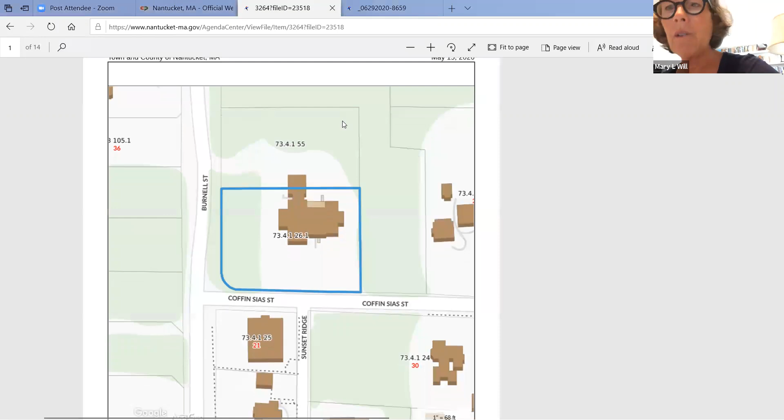Is this the existing, the old Watrous house? No, this is Mrs. Watrous' house. It's the submission by the Gabriels to basically change the house to some degree - windows, gable. Basically they're creating more of an upstairs. The house had an upstairs, it got knocked off the back. Oh yeah, that's right. And so they're recreating it above the main body of the house. So, if you all can see this on the screen.

Yes, okay, this structure here - Chip Webster is the architect. This has been before the commission since COVID. These are the latest minutes from the June 8th meeting for revisions. I have provided comments to the commission as well. It is in your purview, obviously. This structure is not historic, from 1994, but there are changes proposed to it.

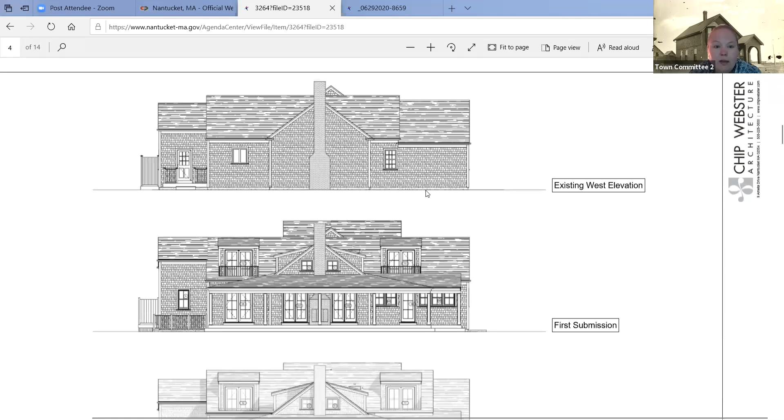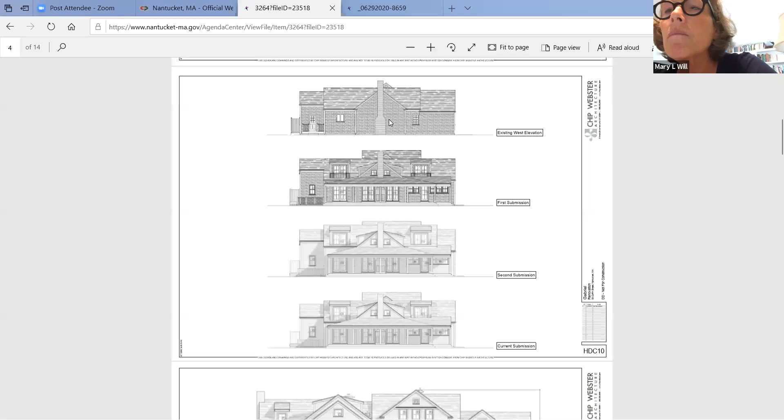And the commission has provided their comments mostly on the west elevation, as you can see here, where you have hardly any fenestration, and then all of a sudden you have a lot. Oh yeah. There is a discussion on that gable, and then the long ridge, as you can see through these. Let me know if I'm going a little too fast - I'm trying to make it so you can see all of these submissions. This was the original, then this is the first submittal, second submittal, and third submittal. As you can see, the commission's been trying to request those things.

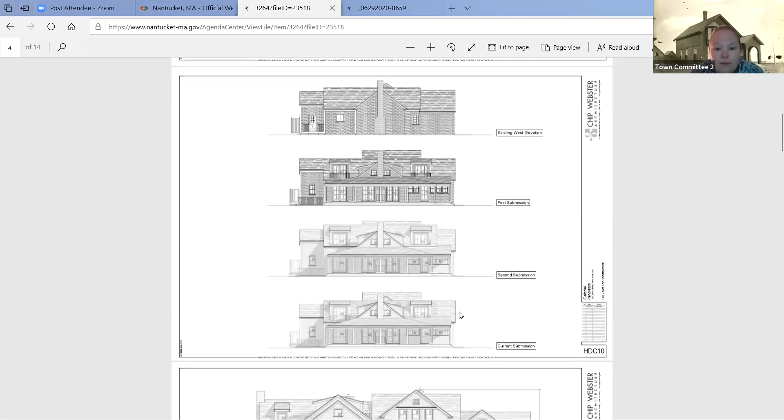Doesn't look like there's been much change in those three iterations. Yeah, it's mostly been the long ridge plane, as well as the size of these gables. I did offer a suggestion to Mr. Webster about possibly, instead of having a shed dormer flanking, a gable end to match that gable end, because at the end of the day they're trying to provide some sort of access, but of course it's the most visible too. So let me go through and show you the changes that they've done.

You can see this is the south elevation. And that faces Coffin Street. Yes, yes, yeah.

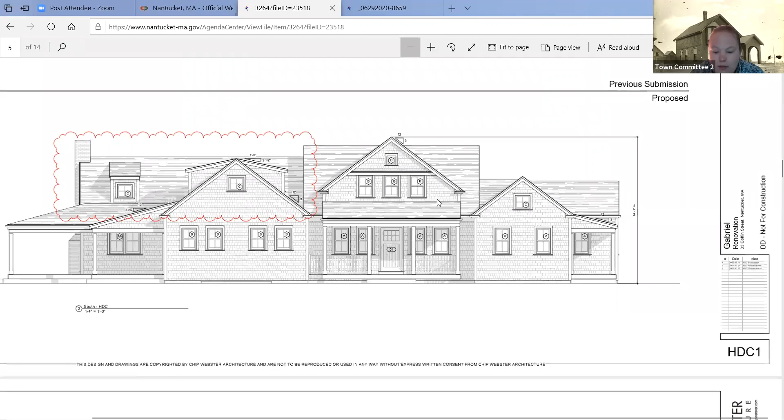Here's the north elevation, and there's discussion of the distance of the decks. Mr. McLaughlin's really good about making sure they meet those requirements. And here's the changes in the ridge.

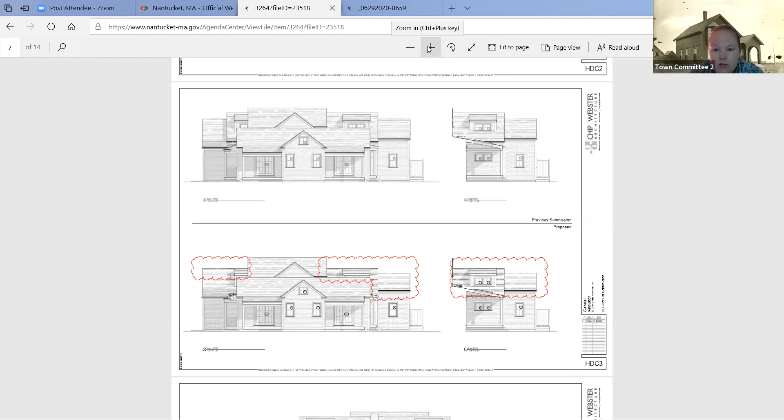That's come down quite a bit. I see.

So here's the view from the west elevation. I was looking at the west, and I thought the first proposal and the third proposal were exactly the same, which is what Holly pointed out as well. And as you can see, even here, that ridge, without looking at the scale, we don't know exactly what that is, but it looks pretty long.

Not broken up. We've got the schedule, those changes to the floor plan, and those decks.

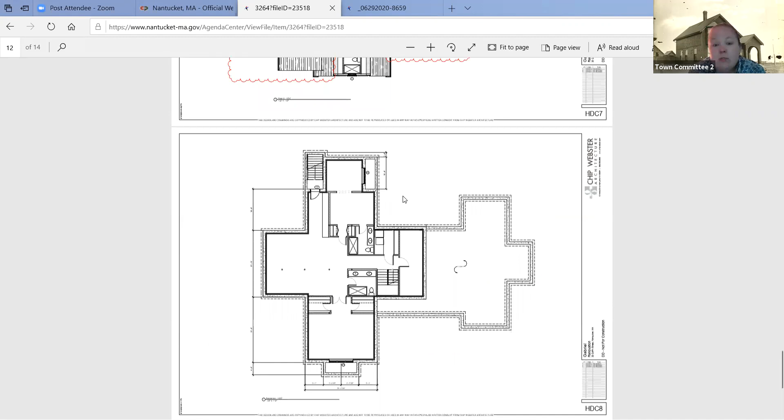This application or this property also received a review and approval, essentially, for their landscaping, hardscaping, for the proposed pool. Both staff and the commission were concerned. I apologize, I'm trying to make it so you guys can see it.

You're doing fine. Thank you, I don't have a mouse. This is a new laptop, or new to me laptop I got from the town, so bear with me.

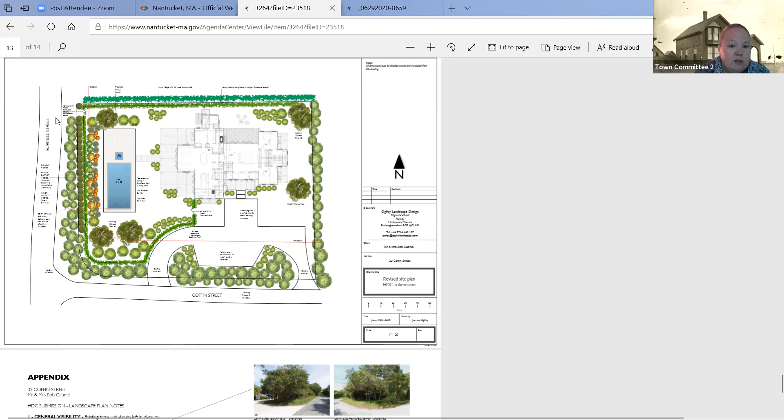So they did essentially approve the pool, or the landscaping plan for the pool. There were concerns on the visibility, obviously. There are going to be a lot supplementing the existing, and also the gates, the proposed gates, just didn't match.

Here's the hardscaping and the landscaping that they proposed. So that's just in here as an FYI for you all, but I can go back to the elevations.

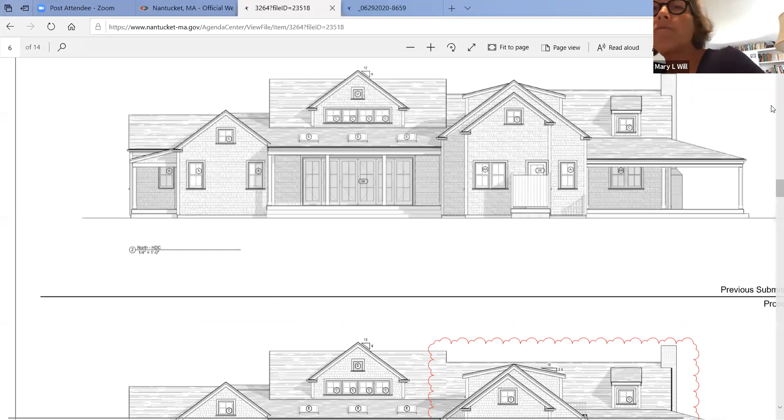So the reality is that the house, the west side, really won't be seen from Burnell Street, given all the vegetation that's planned. It's pretty hard to see the house from Burnell Street as is now. That extra long ridge line, interestingly, there was an even longer ridge line before they knocked the back of the house off in order to subdivide the property.

So the Gabriels, actually, their extension of the west facade is not as great as the west facade used to be, I believe, when it had a garage apartment back there. But the garage apartment had to go so that the property could be subdivided because it crossed the boundary line.

So I don't have a problem with the length of the ridge line. I mean, this is a house which isn't the most architecturally beautiful to begin with, I would say. It seems kind of in keeping. If anything, it's a little bit more visually interesting on the west facade now than it has been.

Yeah, the west facade is where the pool is, so obviously they want the French doors to go out to the pool. Exactly, which looks fine to me.

Yeah, at the moment there's quite a bit of vegetation between Burnell Street and there, and looking at their plan, it looks like they want to keep it there, keep it that way. And increase it. Yeah, and it's pretty secluded within the lot.

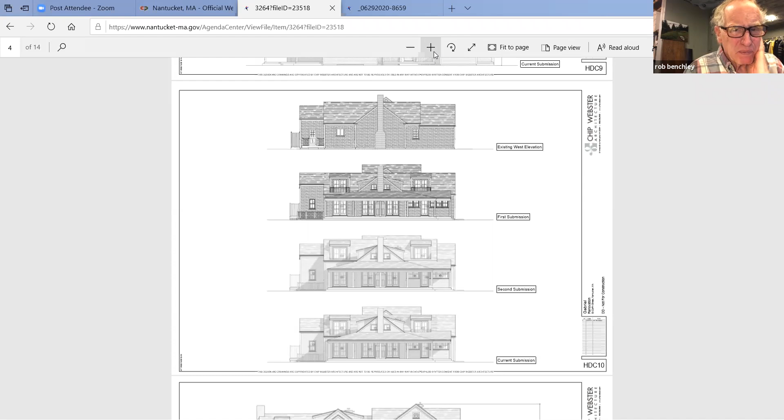I would argue that the fenestration, which I believe is the thing we have a question about, that it has quite a lot of additional fenestration. I would argue that actually improves the look of that facade, that west facade.

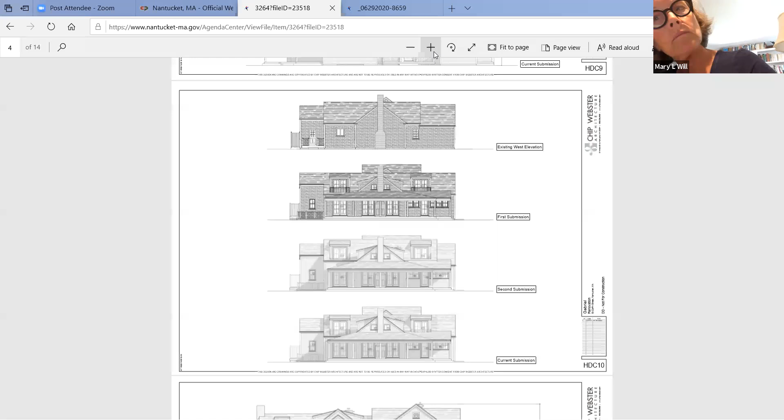Angus, do you have anything to add? I feel like it's unfortunate that there are two competing centers to this house. There isn't a part that looks, except for the front door, that clearly says this is the beginning of the house and we're sprawling out from here. That addition to the west of the original section just feels higher than it should have for the height of the original part. It feels like there's too much of this house that's the same height.

I feel like the fenestration on the lower level does enhance, and I understand, facing the west, the pool on the first level, that makes sense. Where I really have problems with this proposal is with the dormers. They're not meeting the minimum 4 pitch. One of them is 2.5 and the other one is 3 pitch. It feels like a flat roof box trying to do exactly what it's doing, which is to provide space where there wasn't any.

And I don't think it's graceful. So like that gable that faces Coffin Street, I would remove those dormers or reduce them to at least a 4 pitch.

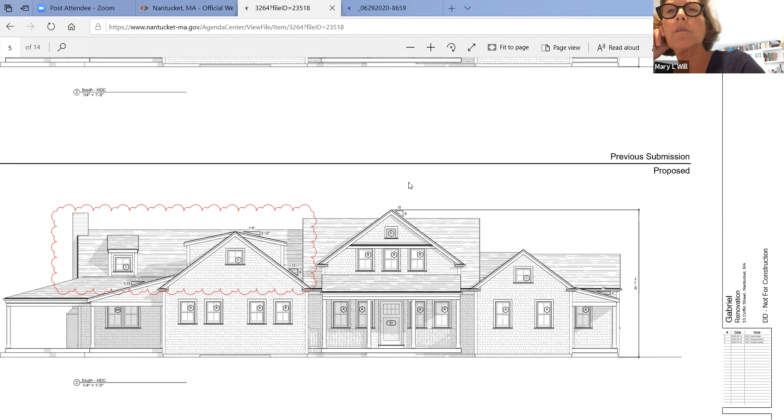And that's, and the change in that pitch is within the guidelines. Yes, correct. Thank you.

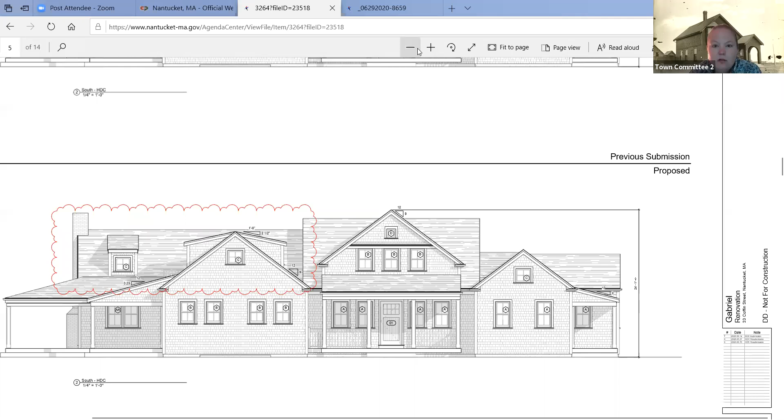Okay, any other comments? Holly, did you already make comments on this? Is that what you're reading in the very beginning? Yes, I did. That is the, if you have the view pack, it's 33 Coffin Street staff comment PDF.

Yeah, I've reviewed it a couple of times. I think I reviewed it for June 8th and June 16th, and unfortunately I was not present at the June 8th meeting. I took the day off for my brother's graduation. But on June 16th, they didn't seem to address the issues the commission brought up regarding this west elevation and the visibility of that long roofline.

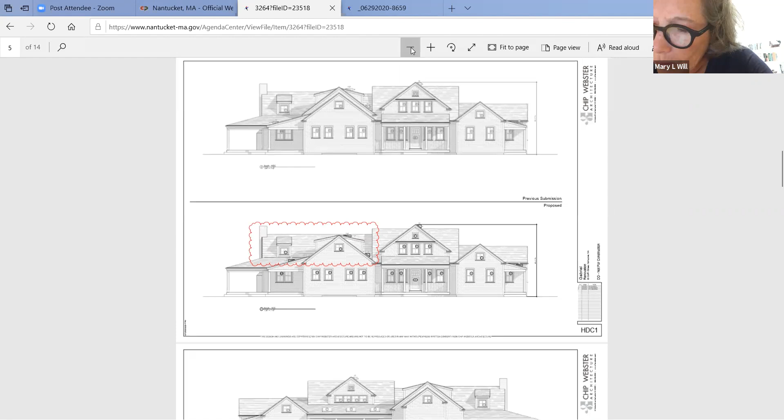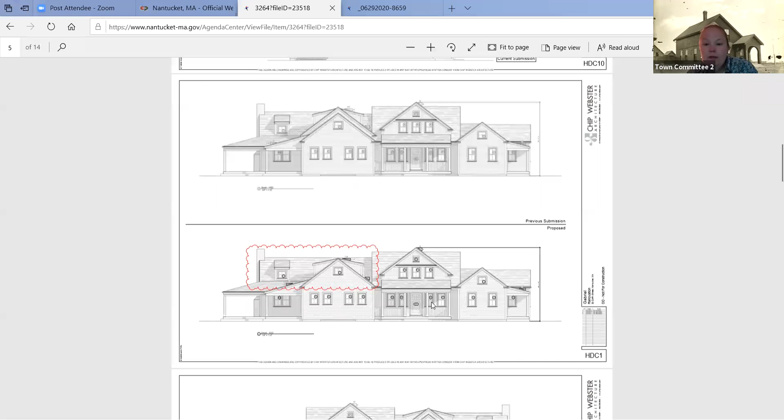Yes, sir? I'm sorry, I note also you said the pool was not moved towards the house as requested. Can you tell if that's still the case? No, actually at the June 16th meeting they did approve it, that they were fine with that proposed landscape plan. This PDF seemed to address their concerns with the visibility.

I think this is a great indication of the site plan here. Seems to really... Yeah, Rob, I remember hearing that in Sconset you're not supposed to have a circular driveway or two entrances to one house.

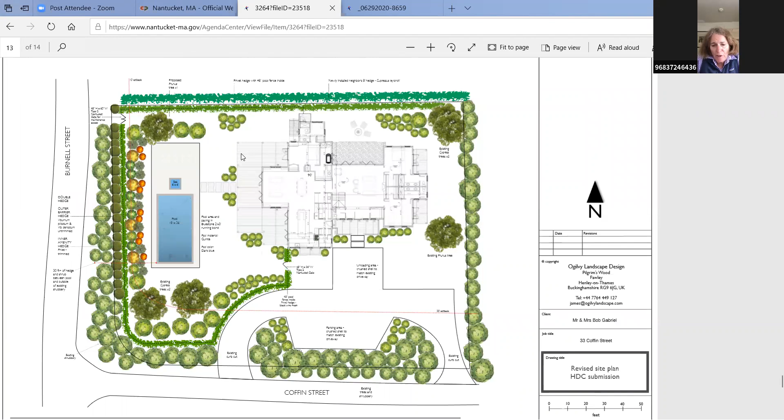But the house next door to this house also has an oval, or curving driveway with two entrances. So I assume that was approved by the landscape people.

I also, on that point, Clement, I believe this driveway was pre-existing. Yeah, it is, and that nothing has changed. So therefore, from the zoning bylaw perspective, that's fine.

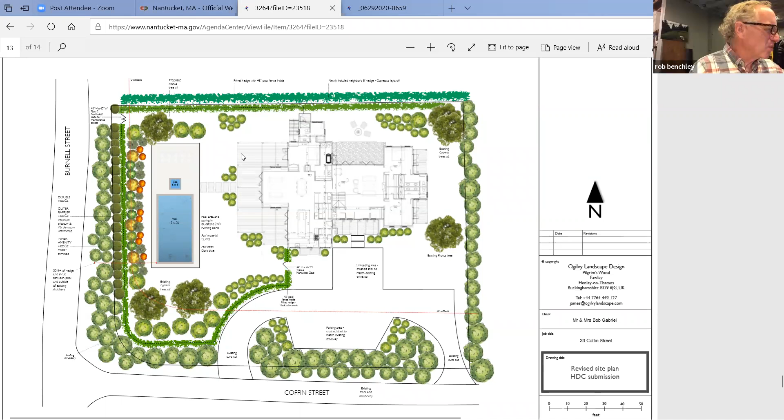Pre-existing non-conforming. Yes, if there's—and I haven't confirmed that 100%—but if there's aerials showing it prior to '98, then it's pre-existing non-conforming from a zoning perspective.

Does the commission or the board have any other comments on this one? I don't think so. All right, we'll go on to the next one.

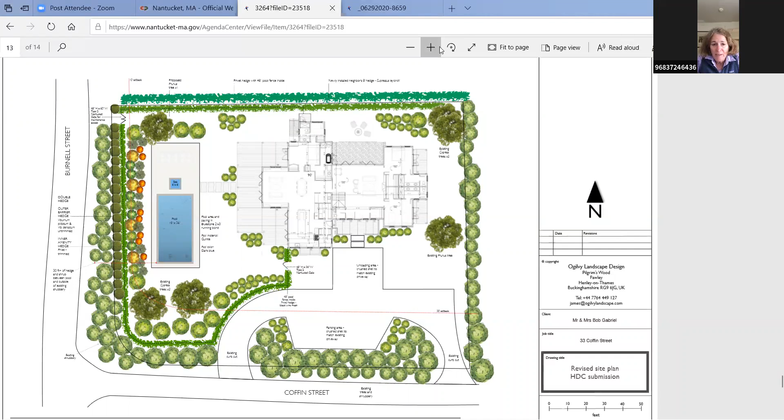Well, the one comment I had that's kind of weird is that when you go from the pool to the bathroom, you either have to go through the living room, the kitchen, or go around to the outside. Usually there's a pool house, but I guess they cannot build another house, so you have to go all the way around. But that has nothing to do with us, that's their problem.

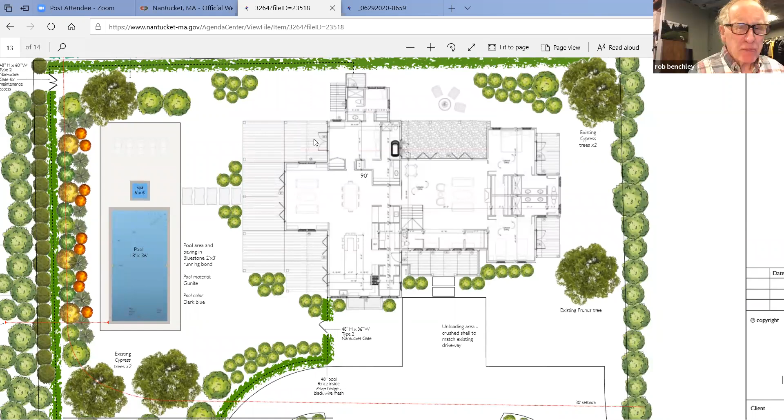And there was a question asked if there was going to be any other accessory structures, if you will, and they said no. Just pee in the pool. Yeah, or the... love them.

All right, and I hope you all were able to see the other documents for this application that was available in the packet. That was the most...

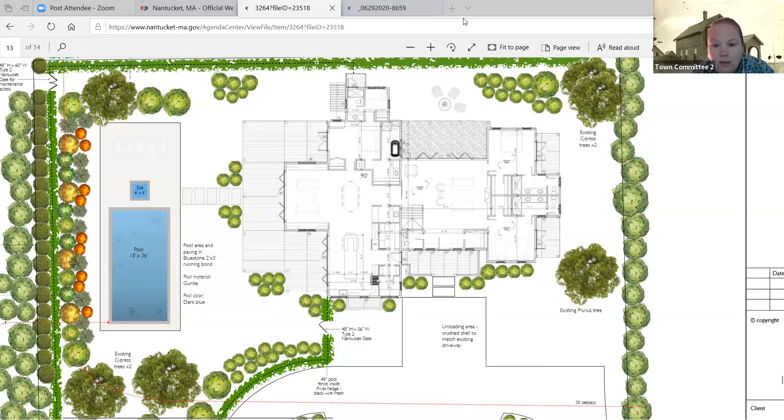I will note this has not gone in front of the commission since you all have seen it, I believe, or at least since COVID. I think this was one of the last things we saw.

I think so too. I have to remember, it was my very last day, yeah, it was March, right? It was probably the end of February. I think Caroline was away in February, yep, had gone away.

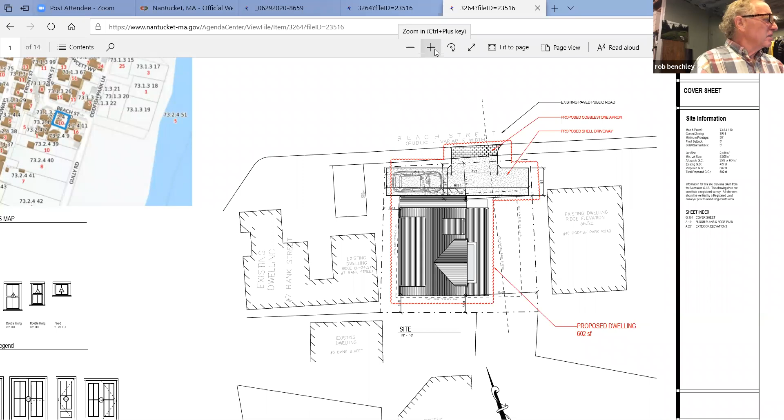Yes, we were really concerned by this. It's a game changer. And I will say that, as staff, this is something I was adamant on making sure you all review prior to it going through to the commission again. Thank you.

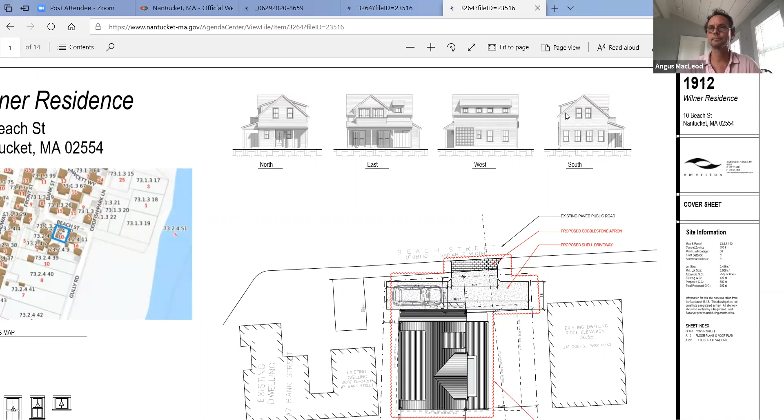Absolutely. Here are the elevations. Somebody's ringing, I'll get it. All right, sorry about that. It was my niece.

This was one of the last projects that we looked at before the pandemic, and I think our concern really was that this is a whole vernacular that was in that area, because this was the service part of Sconset, and the structures were modest. To the untrained eye, it looks like a trailer, but it is historic, and it's representative of a past time there, and unfortunately the proposals haven't really been sympathetic to the original design.

It's been more of a concept of what can we do on this lot if a house didn't exist here, and I don't think that that's changed that much over the iterations they've presented. It has gotten better than it started, but it's still ignoring what was there, I think.

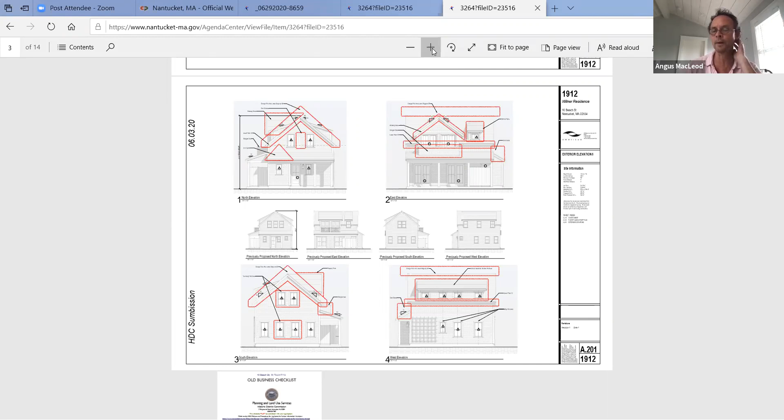From what I saw, it's basically down a foot, the height of this is down a foot, so that's about it. They separated some windows and took out a window here and there, but nothing significant. They're still changing the game. They're changing the neighborhood. They have obliterated the past with this submission.

Couldn't have said it better myself. And you all did see in recent reviews of this, the information provided from NPT staff as well as some abutters. We did, and it was excellent.

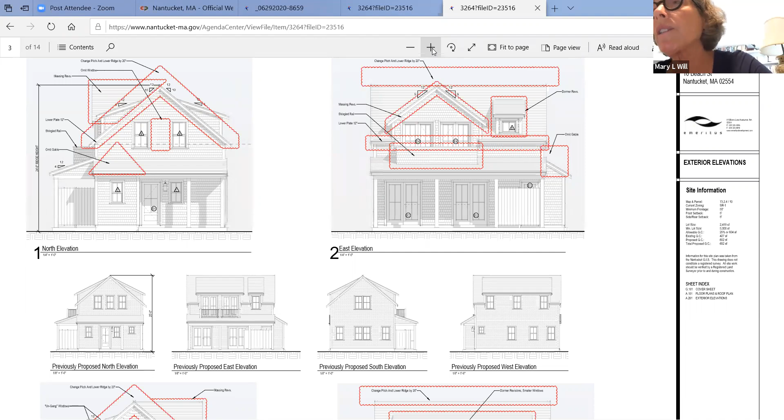When you see the house in its 1912 iteration, it is charming, absolutely charming, and it's very symptomatic of its time. It could be restored, but it would not be if this is approved.

I believe these are minutes from the last time it was reviewed. Okay, so February 18th, yeah, I figured it was February. And of course, the proposed demo is being tracked with the proposed plan.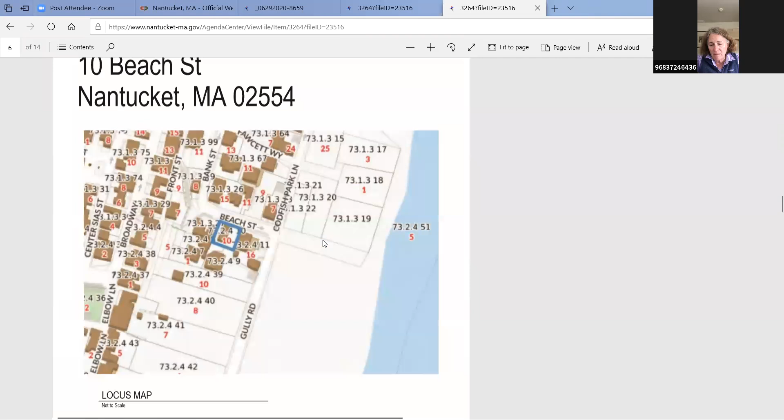That was my question, Holly. So the demo hasn't been voted on either. No, when you have to do the demonstration, as you can see in the minutes from the February 18th meeting, they're tracking the proposed demo with the proposed new dwelling house. Correct.

There are some, I don't know how you all want to handle this, but there could be a demolition delay. Just like on the Baxter Road garage. I mean, doesn't that apply here too?

You also have to remember what Building with Nantucket in Mind says, what gives the commission the authority to demolish. Demolition delay is a whole different ballgame that other commissions or other historic districts don't have, the more robust law, if you will, with the special act. So demolition delay only gives you that delay. In this instance, with Appendix C within Building with Nantucket in Mind, that's what this commission has to uphold.

For the proposed demolition, standards for approval, I can read this out of Building with Nantucket in Mind if you want. The commission shall not grant approval of a request for demolition of a protected structure, or any portion thereof, unless the commission determines upon clear and convincing evidence that one of the following circumstances must apply: the structure is not a significant structure, or the structure is a protected structure only by reason of its presence within the historic district and is non-contributing within the district.

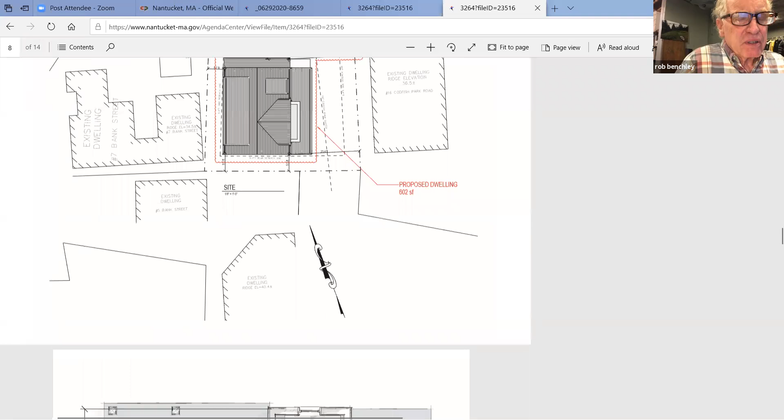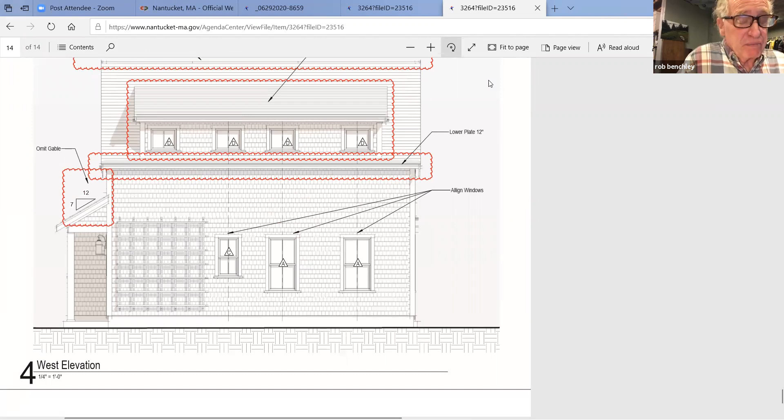My feeling is that considering what's there now and the history of that house and why that house was there, this proposed design doesn't include any of that story. It'll be another piece of Codfish Park history lost. Exactly, and I think that's why we're here.

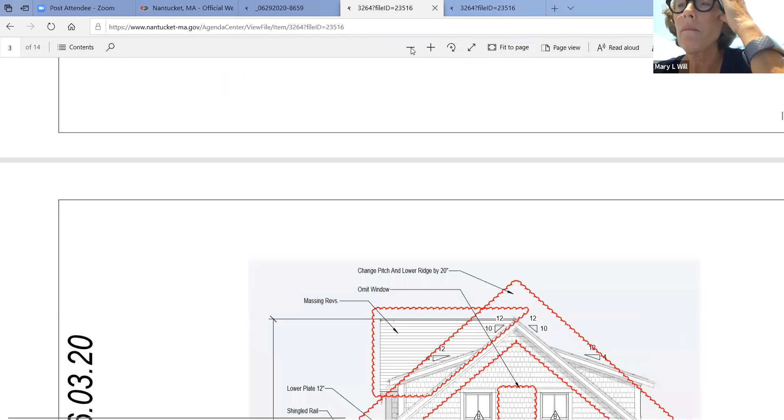To Angus's comment about there not being a really strong entrance, I think they're looking at this as their back house or guest house, since they own the house next door. So those two facades they care about are the one on Beach Street and the one on the eastern side, because they're going to be facing that. They want to just have a common lawn and gardens there, trying to use it as their second dwelling.

So it pretty much sits jammed between the two houses, and it's larger than the existing house. It starts to feel like its own house. So I think it's got to show up for that.

Speaking about the east elevation, I think we might have recommended this early on, that there should only be one set of French doors. The two is kind of overwhelming for that size. And again, if this is a second dwelling, something smaller than the one in front of it, you don't have two sets of double French doors on the second floor. It doesn't seem modest enough to be like the guest cottage.

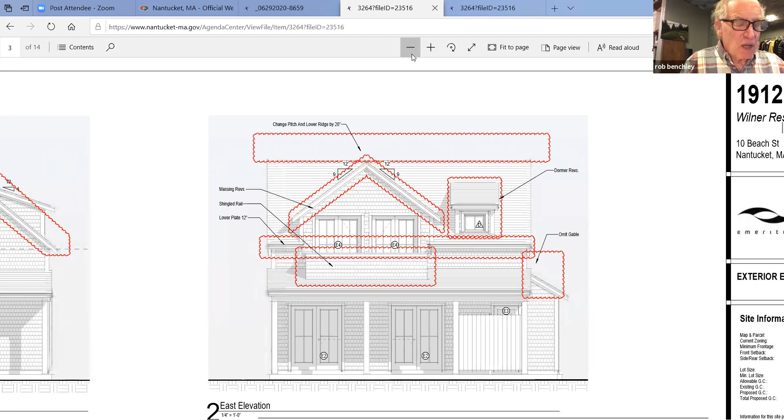That's exactly right, Mary. Well put. Thank you. I agree.

There was, as I recall in the packet, also an approval from the person across the street saying they didn't care. But they're probably happy not to look at the existing house and its disrepair more than what's going to go up. Also, that house across the street is on the market -- Gone Native is. Yeah.

I'm all in favor of what the neighbors think and say, and their word is valuable. But in this case, this is all the neighbors of Sconset.

Right, I'm agreeing with you, Rob, but I'm also saying it's going to be a hard argument when the houses -- the one directly across the street on the corner is like a floor and a half, whatever you call that. And just next to this particular house is a 2-story house, and there are 2-story houses across the street. So there is a precedent on that little street for 2-story houses. But I don't know what was there before that, so.

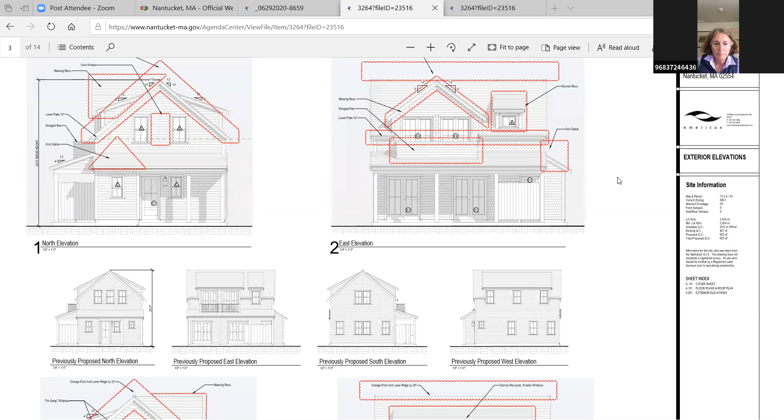Holly, did you say that Matt is available? Matt is here. He sent me a message saying he's here to listen, but if you had any questions, he'd be able to answer. Do you have any questions for Matt?

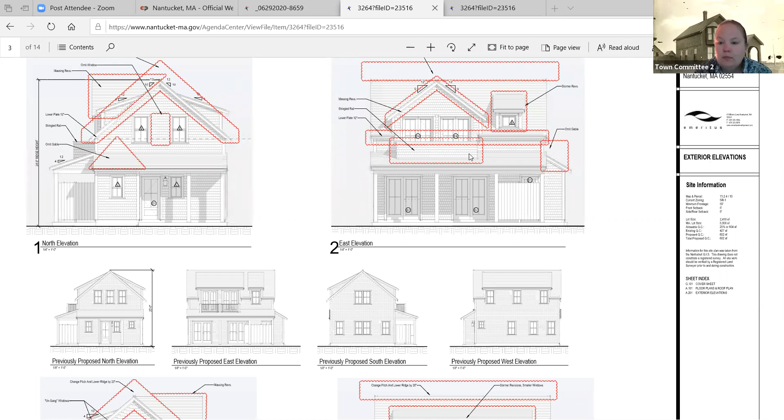No. Yep, I'm here. So there really isn't, I think what we're saying is there isn't really a connection between what is proposed and what's there that is not allowed to get removed. So what's he thinking?

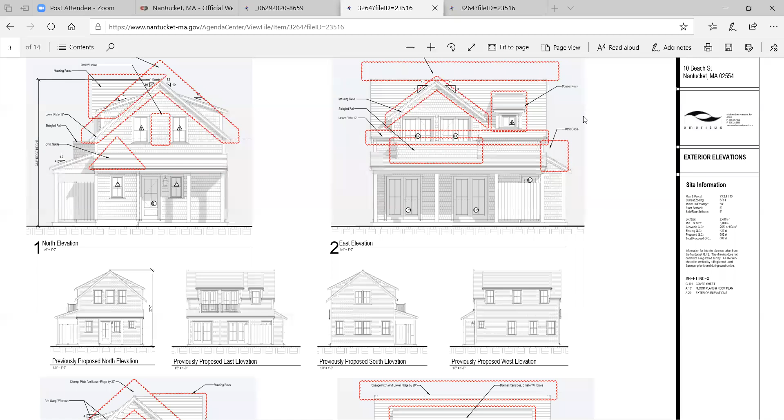So Matt, just to be able to transfer to your clients, do you understand what our premise is here? Yep, I think that's pretty clear. Okay. All right. Matt, thank you very much for coming. Yep, no problem. Happy to be here.

All right, bear with me here. So we move on to... actually, no, it's 73 Baxter. Okay, that's fine. The next one, while we're on the same topic. Yep.

I can't remember, did you all look at this one or no? Was this prior? This was after COVID or when? Not pre-COVID. We haven't, I don't believe we've seen this. We have not. Okay. Thank you for making me remember, because things start to mush together.

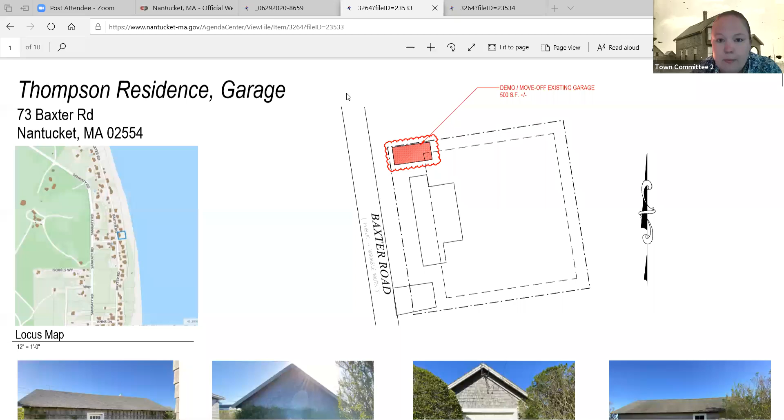All right, so. Oh, and Matt's here for that one too. Yes, this is Matt's. Matt did provide information, additional photographs of the interior. Bear with me, I don't know where they are in this packet, so. Sanborn. Oh yeah, this is the Rosalina Russell cottage, not the main house - the garage, excuse me.

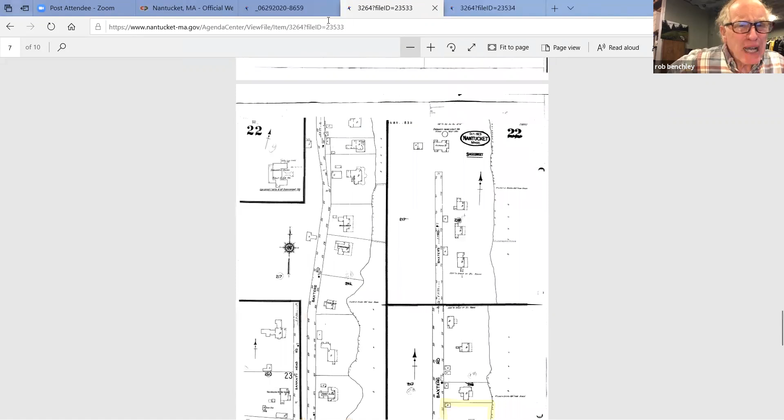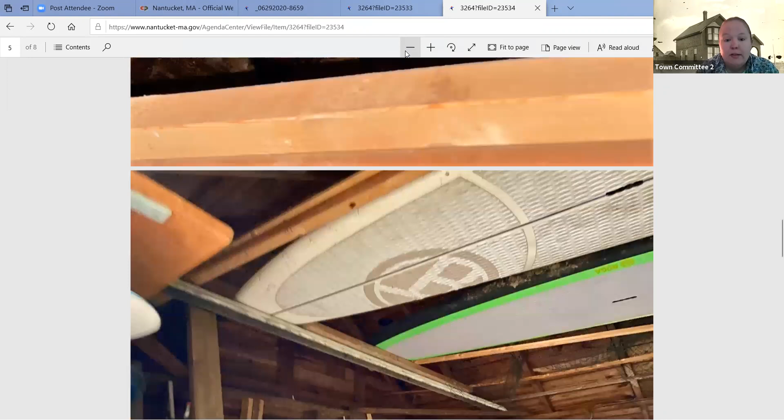Obviously this is a gable-ended garage, 2x4s, 2 foot on center, tongue and groove. Looks like it's slab on grade to me. There was a discussion on whether or not this was a Sears kit. Very possible - you can see the tongue and groove. So obviously everybody all around from the commission, and Matt, would rather see this being moved and not demoed, possibly moved on site. There was a lot of discussion about that.

Let's see, is there any on-site space left up there? This is a property subject to massive amounts of erosion, so do they have a place to move it is the question. It's right on the lot line now, along the front. I could answer that if you prefer.

This is Matt McEachern, by the way, answering your question, Mary. So right now the garage sits over the setback, but there is room - there's some additional available locations for a new footprint, if you will. But our plan is we are looking to move it, and we've actually looked at a couple of different places to move it to.

Holly, this hasn't come up in the HDC meeting, but we did get a preliminary price to move it, and it was $100,000 to move the structure, which is - I know that's what we said - but when you add everything up, the new foundation, it's again... the owners didn't really react well to that, but it was a real number and a real effort, so we're trying to look at all of our options. I didn't mean to interrupt, I just wanted to answer that question. Thank you. Thanks, Matt.

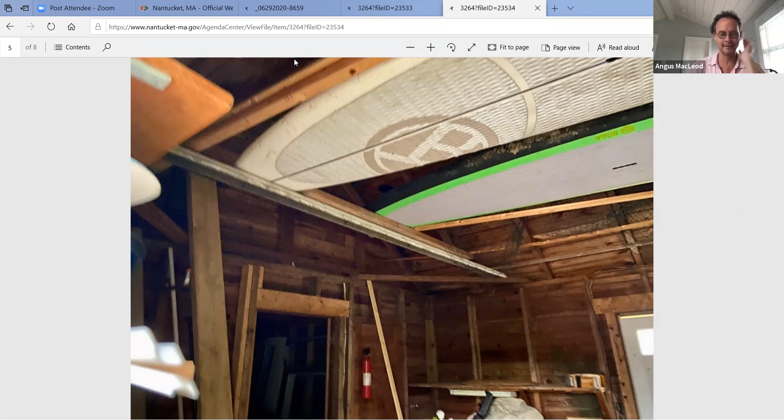Are there any proposals of where it would move to? I mean, 100,000 for an existing garage sounds, it's hard for me to wrap my head around. I know, me too. So what they're up against is we're trying to add an office, kind of a studio space for the new owners, and that's what's driving it. But we did find a place it could potentially go, and it's not that far away. But again, we had a contractor put some numbers together, in a genuine effort to talk about what's involved in moving it—the demo, the lifting, the actual moving itself, and then prepping the new foundation. And then the front door is a fiberglass door.

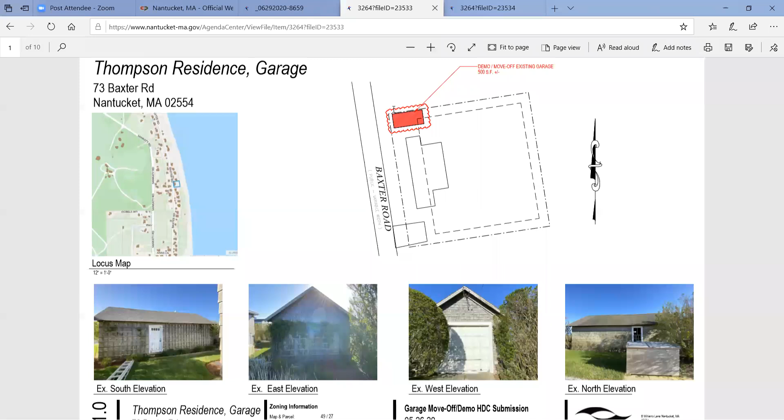I feel pretty confident that it is a Sears Roebuck kit, from anywhere between the 20s and the 40s. I'd say close to the 40s. Anyways, it seems like an incredible amount of money, and I think both parties are probably willing to pony up some cash, but $100,000 just doesn't make sense to anybody. So we're still working on it.

Can the office space or whatever they're trying to add to the program go anywhere else, the back or the other side or somewhere else?

Go for it, Matt, I'm glad you did that. Actually, since we've been doing so many Zoom meetings—if you go to the top where it says View Options, there's a pull-down menu, and then a subheading called Annotate. Any of your participants can draw. You go to Annotate, then Draw, and there's a sub-menu with a little wavy line, color coded. It's pretty useful, I found. Yeah, it's great, like it. Pretty good, and anybody can do it. Anyways, I don't mean to keep jumping in, I'll just sit back. No, it's helpful. Thank you, yes, okay.

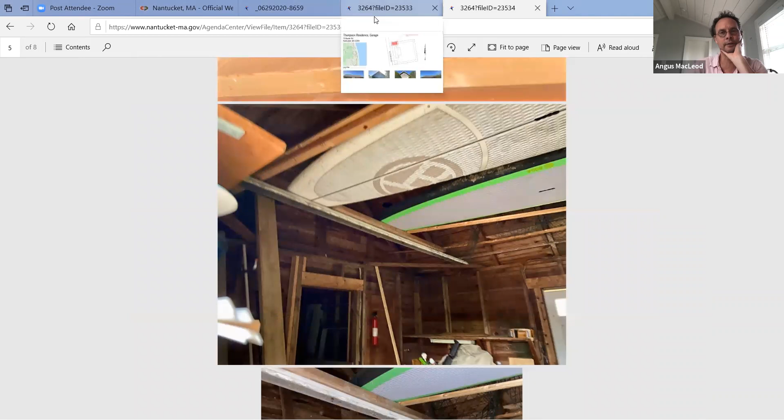Matt, have you guys considered using this structure for the new program? Adding fenestration facing the water and trying to make use of this structure if they don't need the storage for garage space?

Well, they do need the storage for the garage space. And the plan here is to actually essentially utilize a very similar sized footprint, slide it so that it's complying with the zoning setbacks, so that the facade of the structure would be set back.

Sorry, so sliding it back, so it's somewhere here. And then the thought was to put a 3 to 4 foot knee wall on the second floor, utilize a similar pitch roof, and get some second floor space out of it, and then utilize the first floor for necessary storage for a car, a lot of bikes, et cetera. And then also a secondary office space for Mary—Bruce would be on the upper level and Mary on the lower level. But the idea is to utilize a very similar scaled footprint, match almost the rafter roof details. Obviously change that door, it's not original, that's a fiberglass roll-up door.

So in some ways, yes, to answer your question, our intention is for it to be very similar in style and language. But the prospective - I mean, you saw that is pretty clearly a kit to me, and retrofitting that, I just don't think you'd be altering so much of it. I don't know how much of it would be really worth keeping.

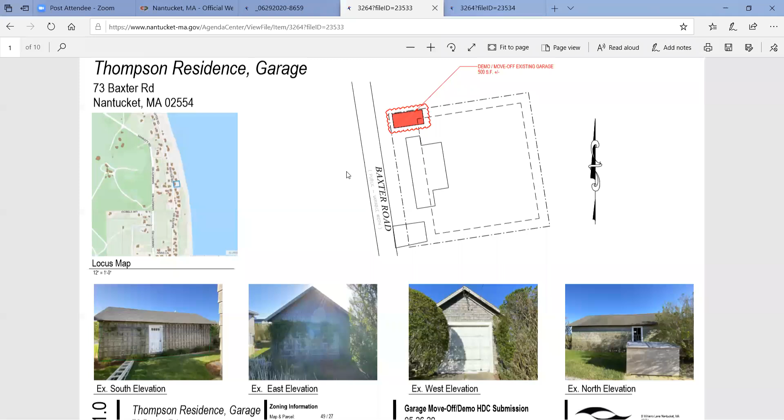And Angus, that's an interesting idea. I totally - again, that was my only hesitation, that it might look too tall and vertical, but maybe not.

Well, I think it's a terrific idea to track the two together. Because that way you can show us how you're incorporating the old with the new. Sure, yeah, and that'll be up - that makes total sense to me.

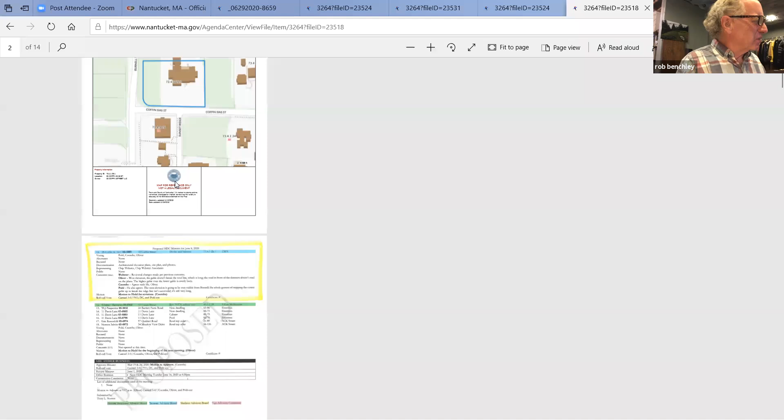Rob, excuse me, I have to leave, it's Caroline. All right, I'm sorry. That's quite all right, thank you. Thank you for joining. Okay. See you around campus. Thanks, Caroline. Hey Caroline, bye.

All right, bear with me here. See, I'm having to go. All right, so that's what it was. I put the wrong one. So we want to do...

6:30, yep, you're right. Here's the cottage, and then we'll just... next one, MH, is probably the main house, sorry guys. Yeah, I think the most important one to go first is the main house. Yeah, yep.

And this was an 1892 shingle style, and the proposal has changed a couple of times based on commission and staff's comments, which is great. Give you all the site plan. All right, I'll defer to you.

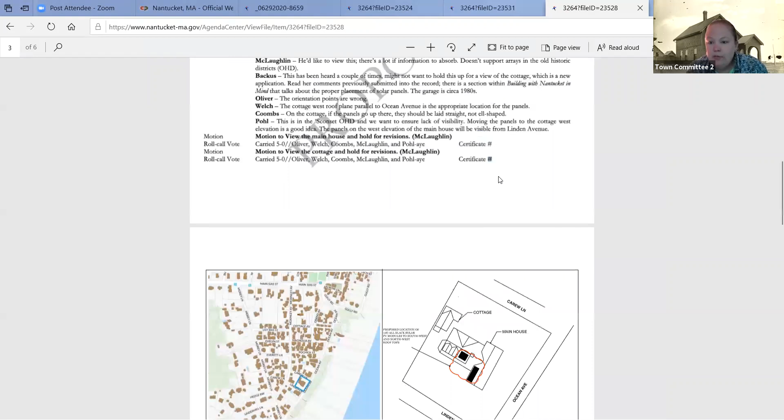Okay, so for the members, I can give a little context here. This is for Kate O'Reilly. She's the daughter of Mary Heller. They own this property on Ocean Ave. They'd like to add solar panels to the property.

We've currently got two designs that we are proposing. One is on the main mass, the main house, on the southwest roof and the, I guess, sort of northwest elevation of the main house. We've modified the design to remove some of the panels in that lower valley, sort of between the two arrays that you see right there.

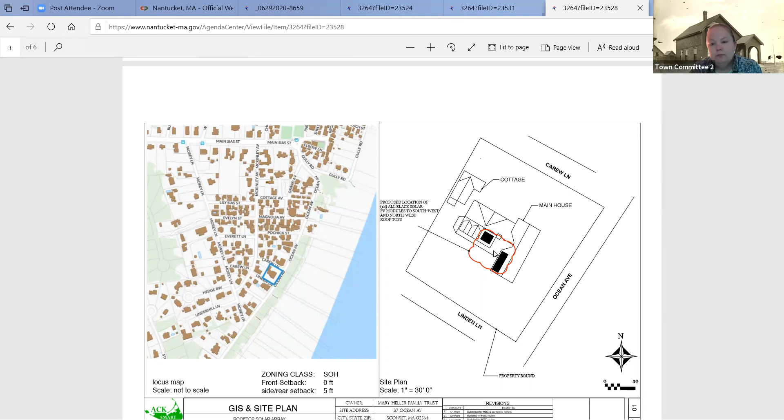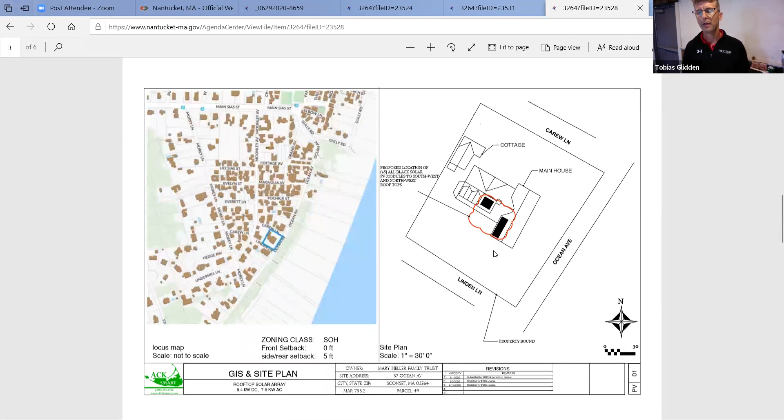The owner is also proposing, as part of the project, to move a hedge that sits about 10 or 15 feet off of the house. They're actually going to be moving that hedge all the way to the edge of the property on Linden Lane. You cannot see those elevations, those panels at all from Ocean Ave. We've got a bunch of pictures here in the proposal that gives those perspectives. And with the hedge being moved to Linden Lane, we don't believe you'll see the panels either.

And we've tried to show this view here - thank you, Holly - this view actually shows that we have lowered the panels on that main mass. If you go to the next page, you can see what the effect will be when the hedge is moved. You can see that hedge on the left picture. That's going to get moved all the way up to the white picket fence, and that will block the view from Linden Lane.

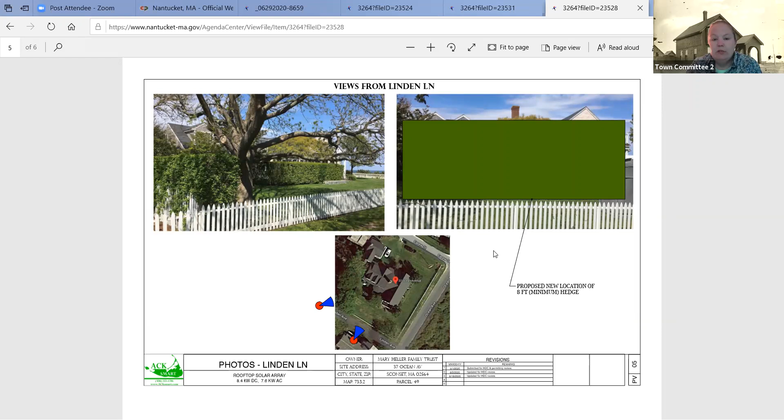Because Linden Lane has been the location of conversation, really and truly, on this structure. And even though it's mostly a footpath that people don't really drive through, at the end of the day, it is a viewable road nonetheless.

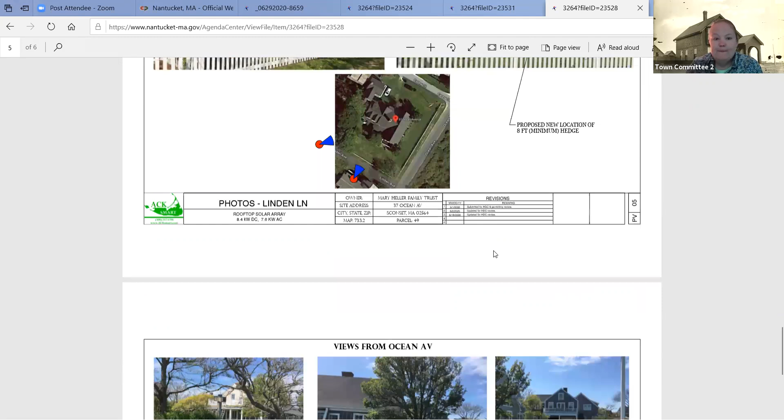Yeah, these pictures show that you can't see those elevations from Ocean Ave of the main house.

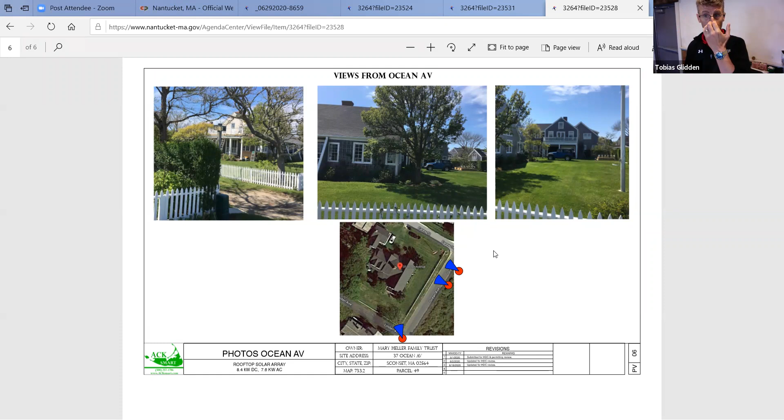Okay, and then... that's not what I wanted. All right, I'm pulling up, I thought I had it already but I didn't. I apologize, I'm pulling up the new submittal for the cottage. There it is - solar main house cottage.

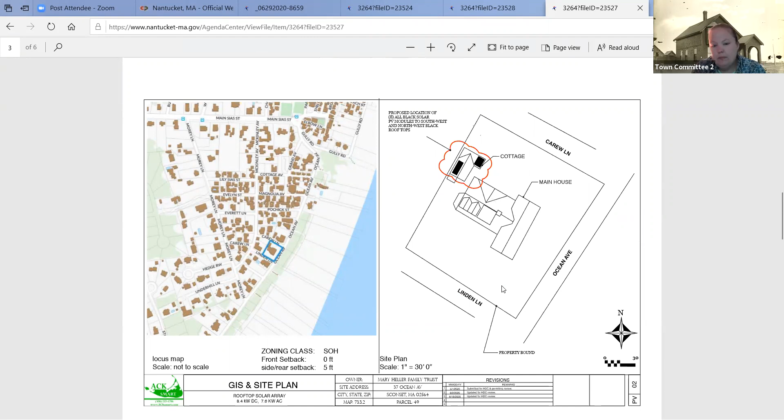Here we go. I did have comments on the visibility from Ocean Ave for the cottage, because you could see it. That was my concern originally from standing over here. Yes, but also the commission had asked for them to put it on this elevation so there wouldn't be visibility from the ocean. Right, so these are the two - this is an updated proposal we have for the cottage.

We had originally proposed to have panels on the southeast elevation as well as the southwest elevation. Based on feedback from the HDC, we moved the panels over to the northwest elevation of the cottage, which is that top array there - there's 4 panels there. And we also adjusted the array on the southwest elevation, that bottom right elevation - instead of being an L shape, it's just a straight square.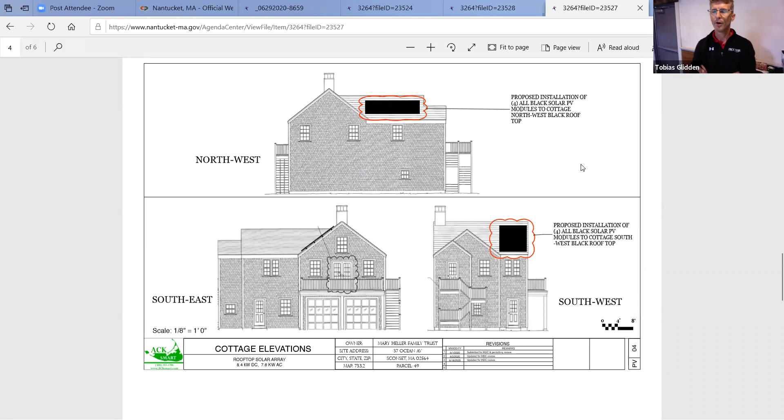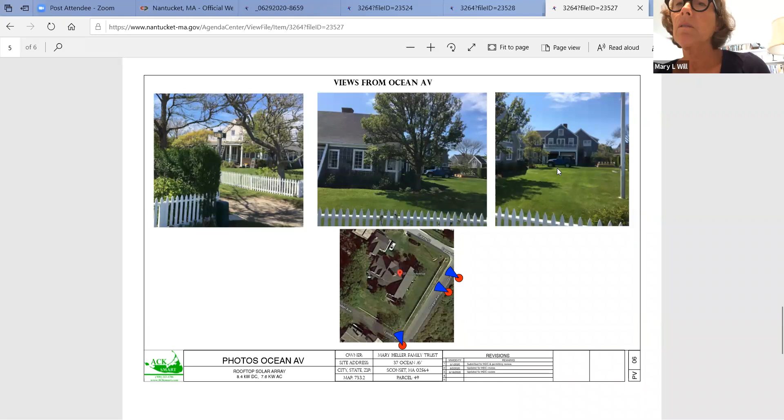And I've also provided pictures from both Ocean Ave and from the side street that runs along there. We don't believe you're going to be able to see the panels from either Ocean Ave with the changes we made, or on that right side street, which is named - what is that, is it Carew? Carew Lane? Oh right, yeah. I think the next slide shows pictures taken from that side street.

Right there, yeah. So there's right on the intersection of Ocean Ave and Carew. You can see - you won't be able to see that southwest elevation of the cottage. And now that the panels are going on the back side of the other elevation, you won't be able to see that either.

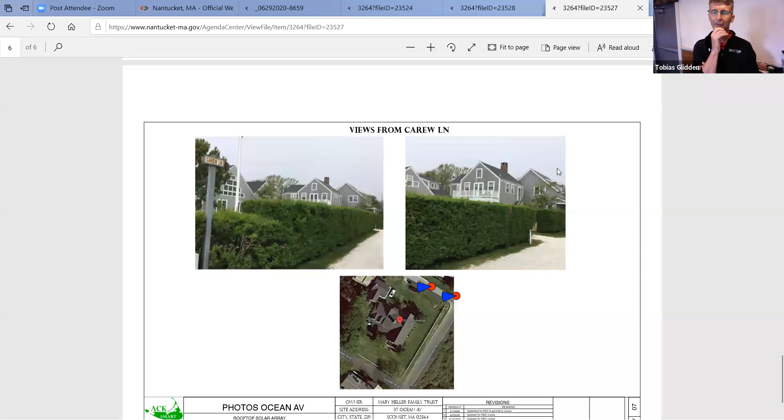And if you, Holly, go back to the previous one - I just want to describe the experience of somebody walking down Ocean Ave. One more back, Holly. Yeah, keep going. Right, from Ocean Ave. So as you walk down Ocean Ave, as you come from the northeast, your view is blocked. At the point that you might have been able to see the 4 panels on that lower right, the main house and that tree completely block that elevation, and you can't see it. I tried to depict that in the pictures.

I'll pause there if anyone has any questions or comments.

It looks to me like you've done everything you can to lessen the visibility of them, and I feel pretty good about it. I mean, it is solar, and it is the way we're supposed to be going, I guess.

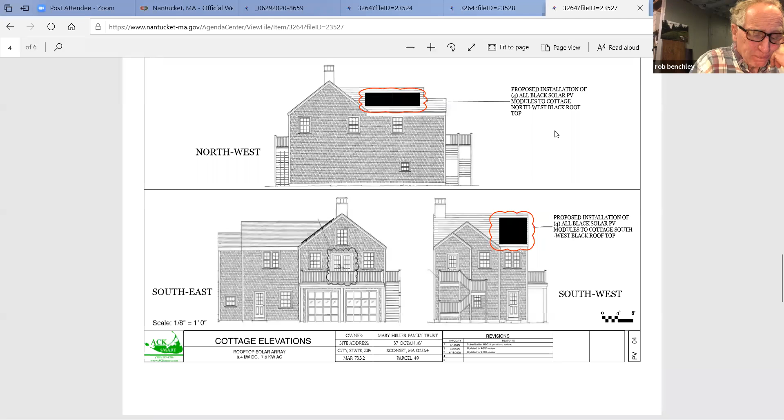I'd be happy to hear from anybody else. I have two questions, and actually I should say that I am in favor of this. First of all, the roof itself is already black asphalt, as I recall - is that correct? That is correct, yes. Okay, so the panels are black, they will fade into the roof in any event, the asphalt roof. And what is the elevation off the roof of the panel? Is it 4 to 6 inches? Yes, yes, they sit about 4 to 6 inches off the roof.

Okay, I'm entirely in favor of it. I think it looks fine. I think you've done a really good job of trying to have the panels in places we can't see them, and it seems like a good precedent. Thank you.

I can say that I'm also in favor of them, and what I appreciate is that the ones that were put on the house on Baxter Road - I can't remember the number now - they're also on the west side of the house, but you can see them from the front, just by 2 or 3 inches. But what you've done here on the main house is lower them in the back, so you won't see that little edge at the top of the roof. So I think these will be totally invisible, and they look fine to me. Thank you.

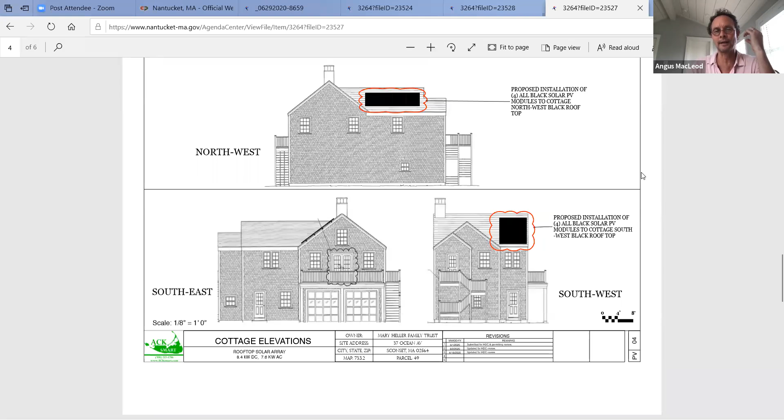I think the garage is an awkward structure, but there's been another structure built right next to it that obstructs the view of the northwest of where you're proposing on the garage structure. And I think that because of all the growth and everything, that southwest panel as well gets obstructed. So I'm in favor of either of those.

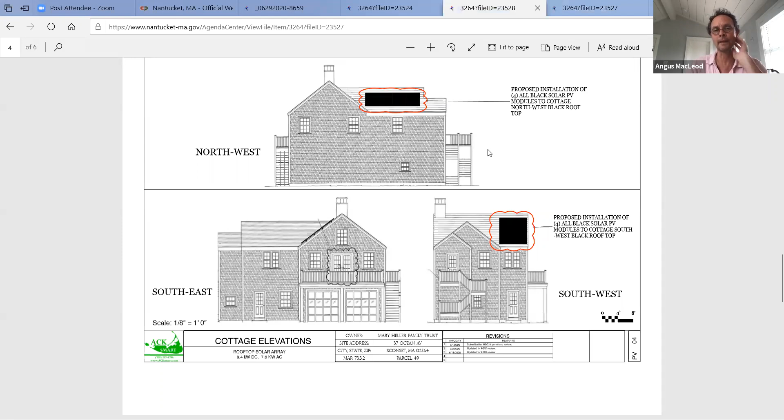I'm really not in favor of anything going on the old main house. Carew Lane is one of my favorite lanes to walk down, and it's wonderful how that yard is one of the few along that road that actually isn't just a walled hedgerow. And it would be nice for it to stay that way. I'd hate for something unsightly on the house that necessitates them walling off the road from the yard. So those are my thoughts.

What's everybody else's thoughts on the main dwelling, on the historic structure?

My only thought is I really appreciate that you lowered that panel that would be on the main house, so it will not be seen from the other side. I don't think Carew's... I also hated when you move that hedge and it looks like this huge green square. But if they want to, it won't turn out to be a huge green square because it'll be alive. But it's not going to be really seen from Carew, I don't think. So I'm in favor of it.

So Angus, a couple of additional comments. There are 2 very large trees already that block the majority of the view of the house as you walk down Carew today.

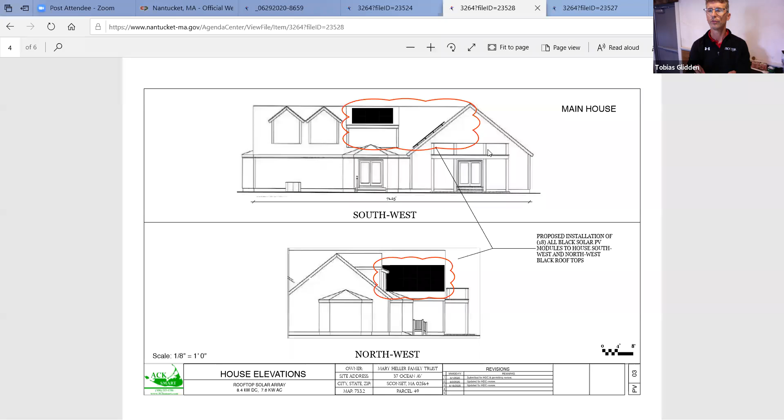I appreciate all that thought going into it. Yeah, that's not a clear best option - solar going on and hedge going up, or solar not going on and them not being able to get what they need or want.

I would much prefer it not go onto the old structure. It looks like there's a tree that's right at that corner, and maybe that fills out enough that, in the summer, it'll obstruct it.

It does. In the summer, that tree - that picture there to the left was actually taken probably back in April, and you can see it hasn't fully come in. And the tree behind it, you can see from that angle, the house is already considerably blocked with the hedge set back. I think if you walk a little further down to Ocean Ave, it reveals a little bit more of the house, but in the summer, most of it would be blocked. The feedback we had from the HDC is that in the winter you'd still be able to see it. And we did comment that, well, there's very few people in Sconset in winter.

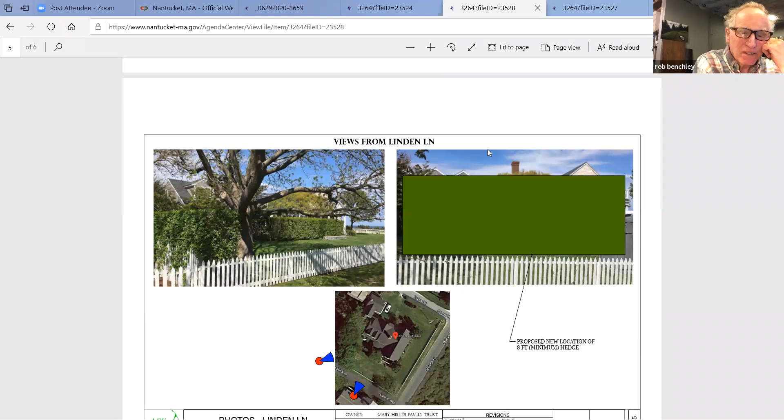Yeah, so for 20 years I was on Pochick Street, a couple of streets away, and I would walk down that lane almost every day. I don't anymore, but in the winter, as all the Sconseters who live there year round know, it's a wonderful place to be. But what this says is that they care about green power, and I think that's a good message. That's preservation as well.

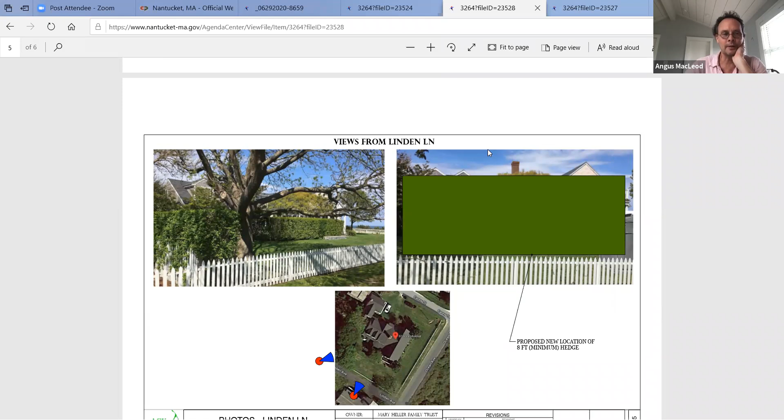I don't know, what does the rest of the board feel about not forcing this hedge issue if the panels go as proposed?

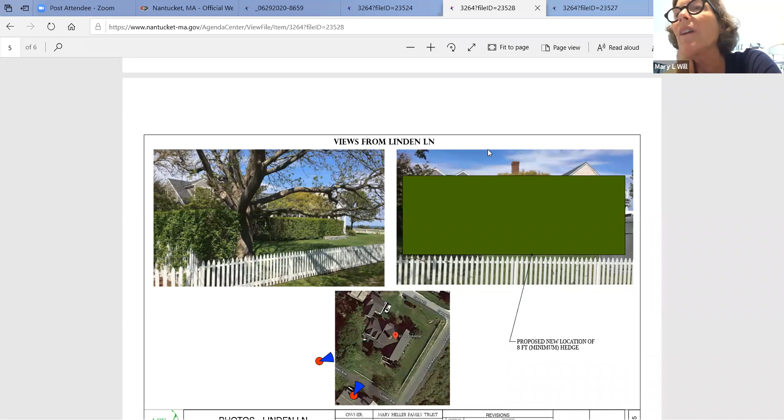I'm fine - oh, this is Mary. I'm fine with not moving the hedge and putting the panels even on the main house, even on the historic structure, because I honestly don't think that if they've only got 6 inches max off the black asphalt roof, we're really going to notice much, even when the tree growth is deciduous and down in the winter. I just don't think so - I think the house is set back far enough from Linden. It's really not going to be all that intrusive now that the panel is lower on the roof line. I have walked by there a number of times in the winter, and I really don't see that much of the house. They were doing a lot of work this winter painting and things like that, and so my eye was drawn there, but I think this will be relatively unintrusive. And because of the benefit of having solar power, we should go with it.

And hi, this is Rob. I agree also about the hedge. These mile-high hedges, that's a whole other topic. I would go with the other board members about not having to move that hedge. I think the hedge is worse because we want to be able to see it.

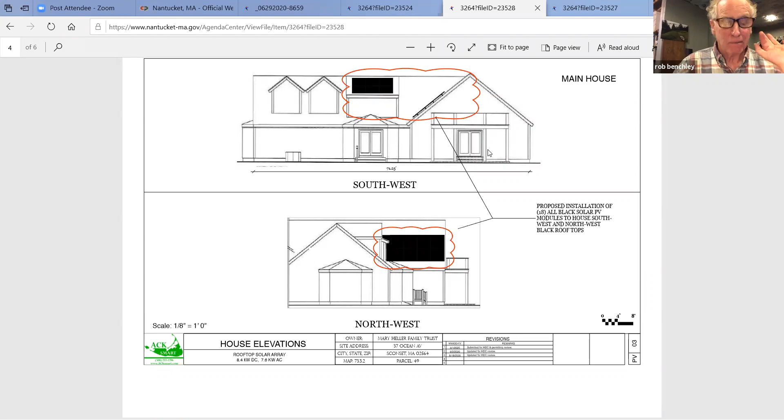Yep. And we need to get our 3-foot high hedge law back, but that's another topic. Yes, we can't go there. No, but this is Clement, you can't really count on the trees always being there, whether they're deciduous or not.

I don't see a good need to move the trees. I also think the black on black will disappear. And I love that you moved it down off the roof line because you won't see it from Ocean. And that is the predominant viewpoint for this house, Ocean Ave.

So what we're saying is that we really don't want the vegetation manipulated. We don't want the hedge moved, just leave it as is. Yeah, I think so. Approve, but leave the vegetation where it is. Agreed. Very nice.

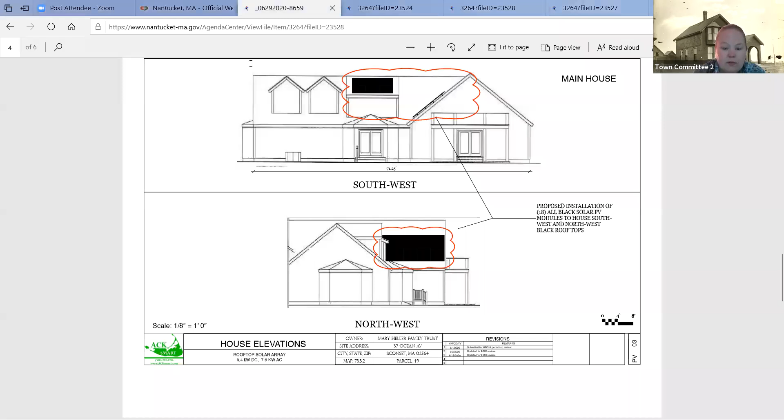Let's see, I'm going to make a motion for us to approve the comments that we've made on all these applications. I think we usually do that in our prior meetings. And I will do this by roll call as requested. The chair notes that Caroline Ellis had to leave early, I believe that was about 12:06.

Mary Lathrop, do you agree to the comments we've made? I agree, thank you. Angus MacLeod, I do as well, thank you. Clement Durkees, I agree also, thank you. All right.

There being no further business that the chairman sees on the agenda, I'll take a voice vote on adjournment. All those in favor? Aye. Chair notes an official adjournment.

Thank you all very much. Holly, thank you very much. Thanks, Holly. Thanks, Rob. Thanks, Holly. You're welcome. I think it went pretty smoothly, and it'll go smoother next time. It will.